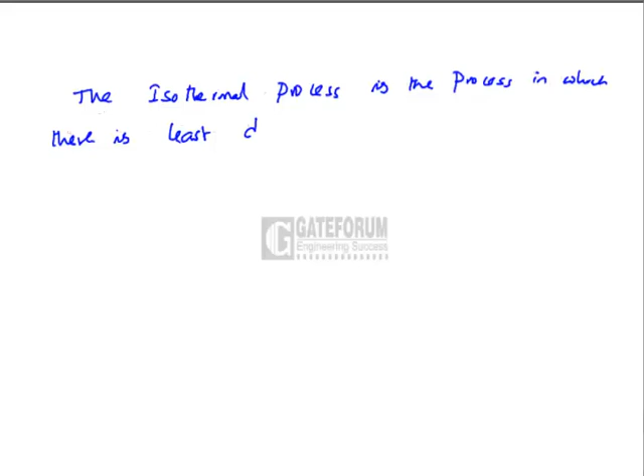This is the process in which there is least degradation of energy, because all the heat supplied to the system is converted into work.

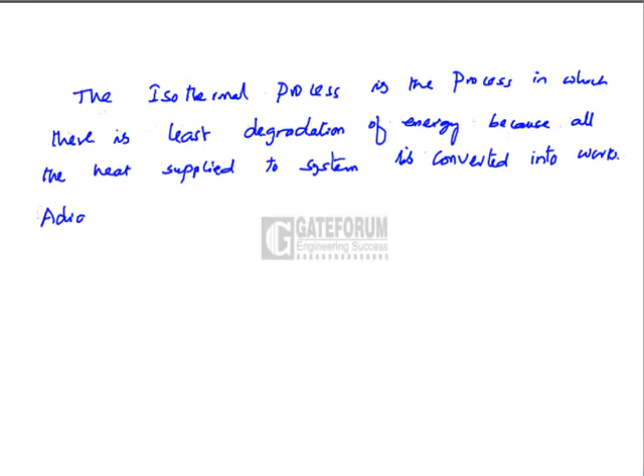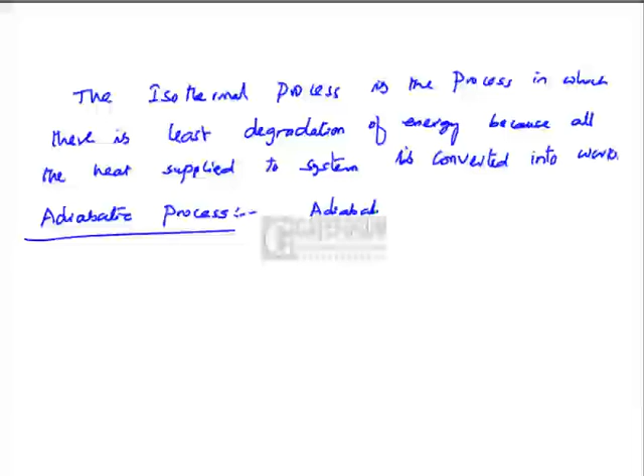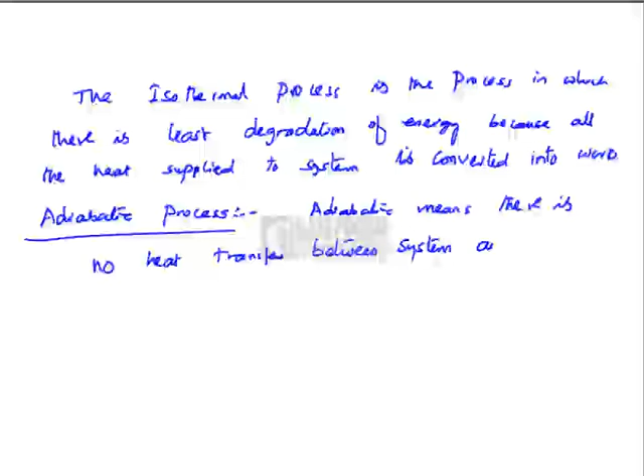Coming to the next process, that is adiabatic process. Adiabatic means there is no heat transfer between system and surroundings, that is Q is equal to 0.

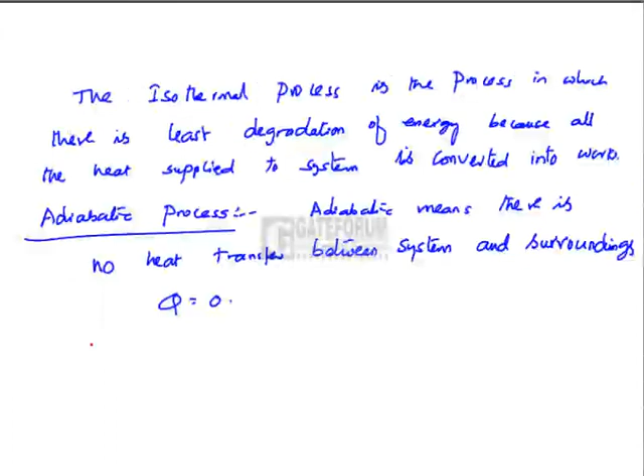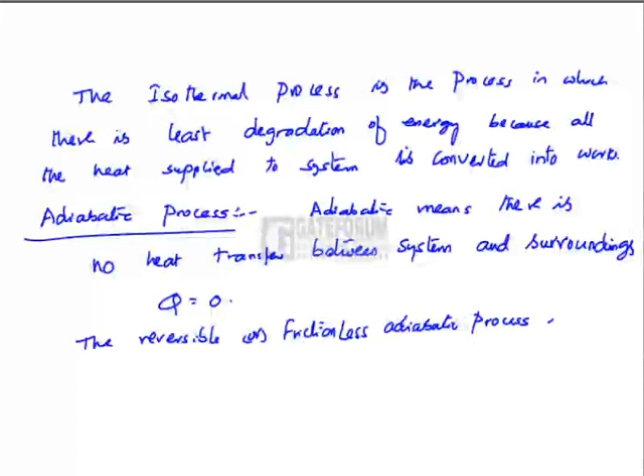The reversible or frictionless adiabatic process is also known as isentropic process, because in this process the entropy of system remains constant.

Iso means same. Isentropic means constant entropy or same entropy. The adiabatic process can be called as isentropic only if it is reversible.

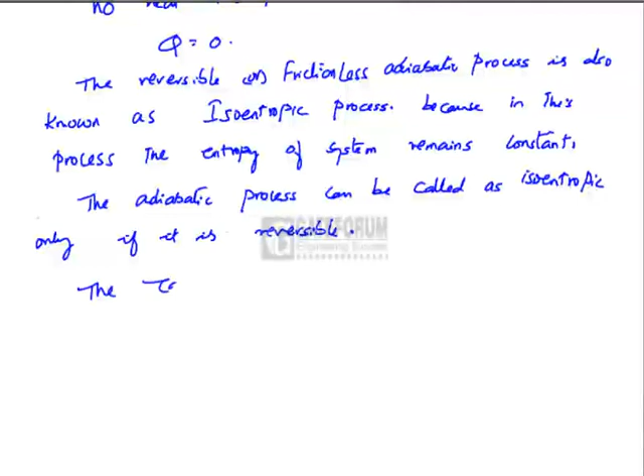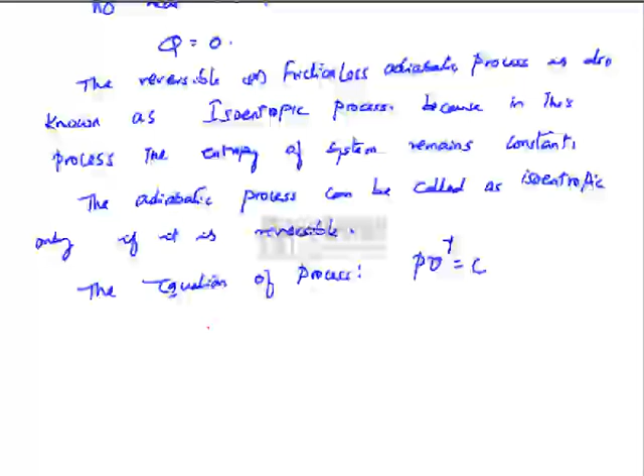The equation of process is PV to the power of gamma is equal to constant, where gamma is the adiabatic index of gas.

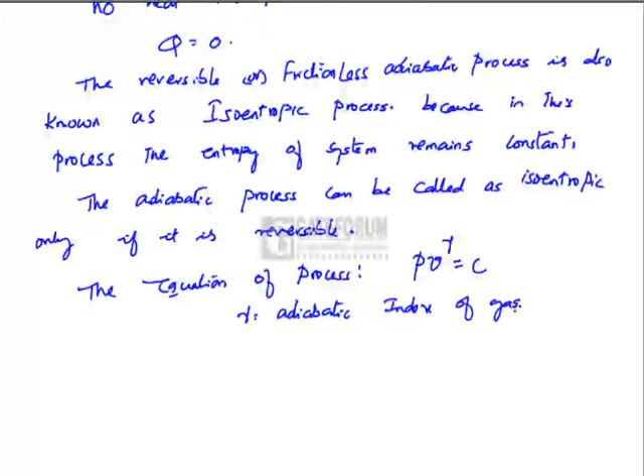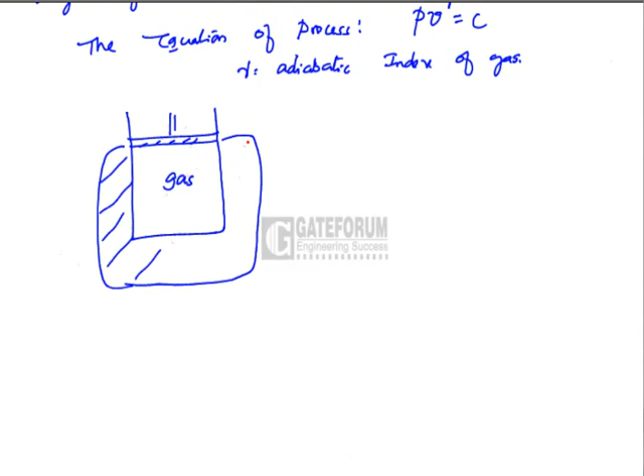Considering a closed system or the gas entrapped in a piston cylinder arrangement, where the system is perfectly insulated from the surroundings. This is insulation, where heat can neither enter the system or be rejected from the system. Heat cannot be rejected, or heat cannot be supplied to the system. Still, the system could do work on the surroundings at the cost of decrease in its internal energy.

The process on PV plane can be represented as a curve, which is a steeper curve than isothermal curve.

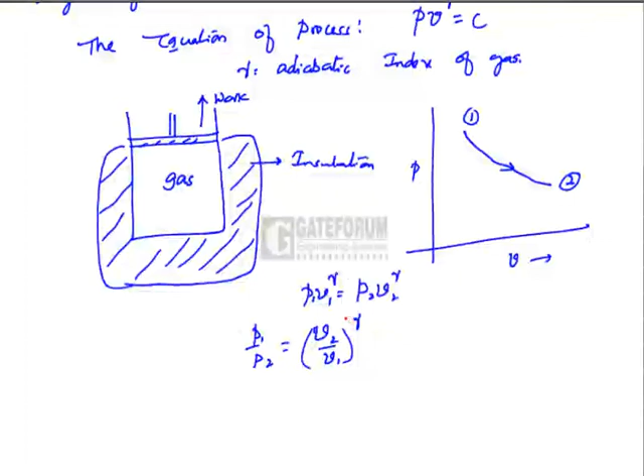The equation is P1 V1 to the power of gamma is equal to P2 V2 to the power of gamma. That can be written as P1 by P2 is equal to V2 by V1 to the power of gamma. Combining this isentropic relation with the ideal gas equation, that is P1 V1 by T1 is equal to P2 V2 by T2. This is ideal gas relation.

Assuming that the working fluid is ideal gas, we get two other important isentropic relations, namely P2 by P1 whole to the power of gamma minus 1 by gamma is equal to T2 by T1, where T2 and T1 in Kelvin only. Also V2 by V1 whole to the power of gamma minus 1 is equal to T1 by T2.

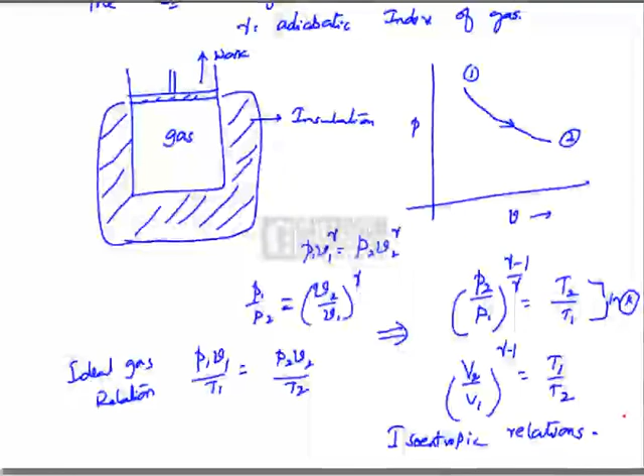These two relations are known as strictly isentropic relations, which cannot be written for irreversible adiabatic process. They should be written only for the reversible adiabatic process, also known as isentropic process.

The work done in an isentropic process undergone by an ideal gas in a reversible adiabatic process undergone by a closed system can be given as integral PDV,

which can be integrated and obtained as P1 V1 minus P2 V2 by gamma minus 1 kilojoules per kg, which can also be written as RT1 minus RT2 by gamma minus 1, that is R by gamma minus 1 into T1 minus T2 kilojoule per kg.

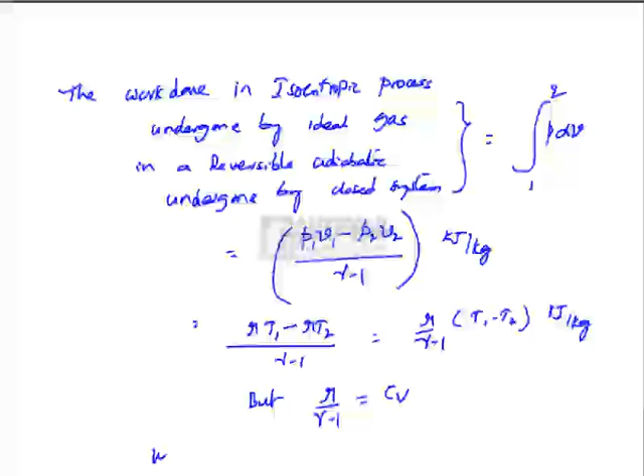But R by gamma minus 1 is termed as CV. Therefore, work done in a reversible adiabatic process can be written as CV into T1 minus T2 kilojoule per kg.

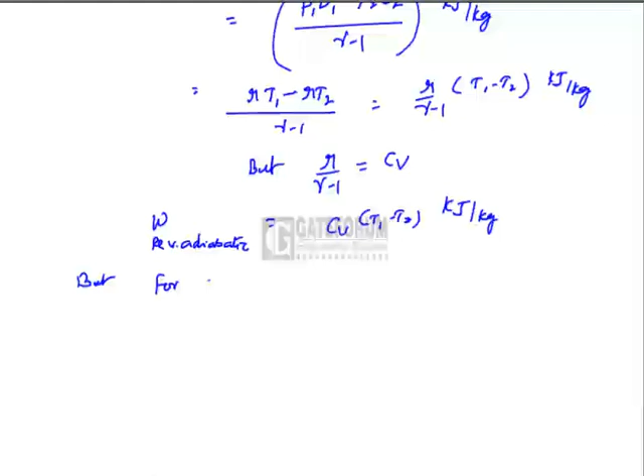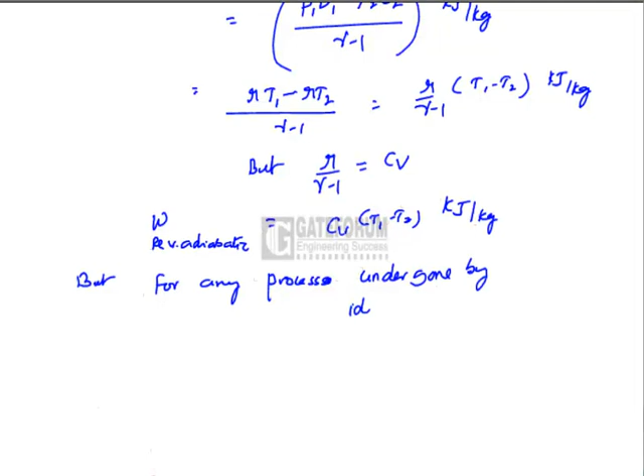But for any process undergone by ideal gas, CV delta T is nothing but delta U. Therefore, work done in reversible adiabatic process is nothing but delta U kilojoule per kg, where U is the internal energy of the gas.

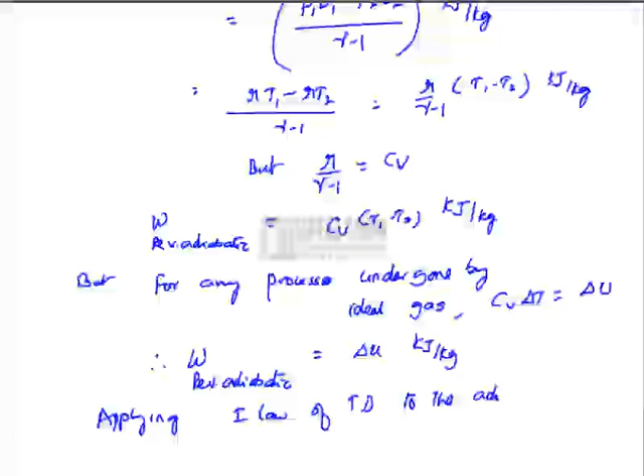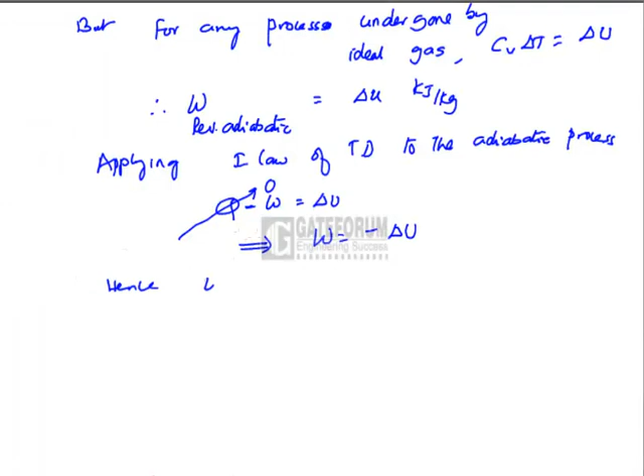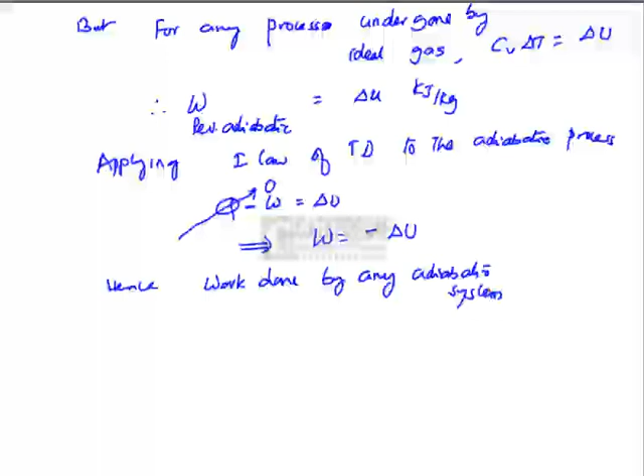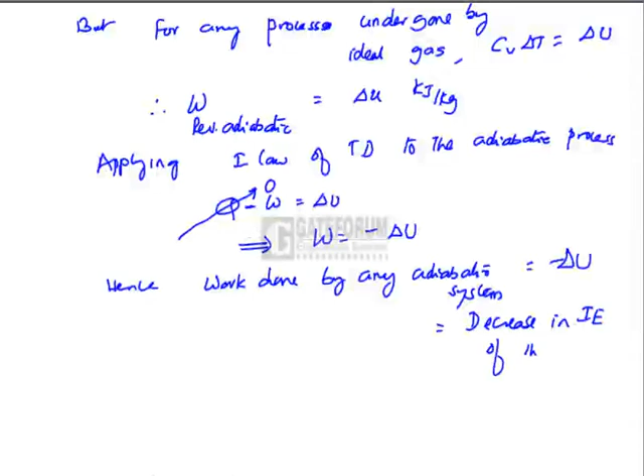Applying first law of thermodynamics to the adiabatic process, Q minus W is equal to delta U, but Q is 0 in the adiabatic process. It means W is equal to minus delta U. Hence, work done by any adiabatic system can be taken as minus delta U, which is equal to decrease in internal energy of the system.

This equation holds whether the adiabatic process is reversible or irreversible.

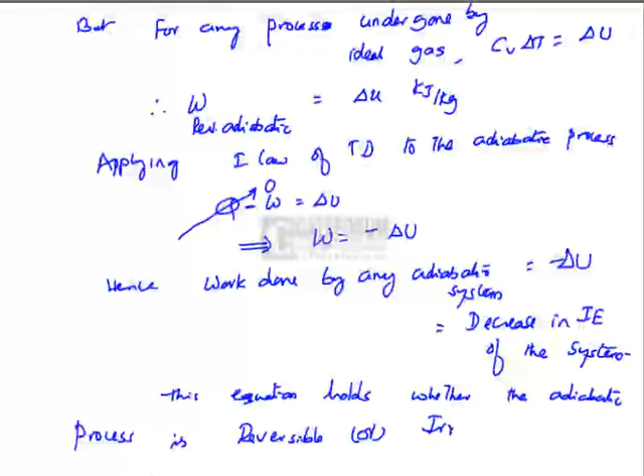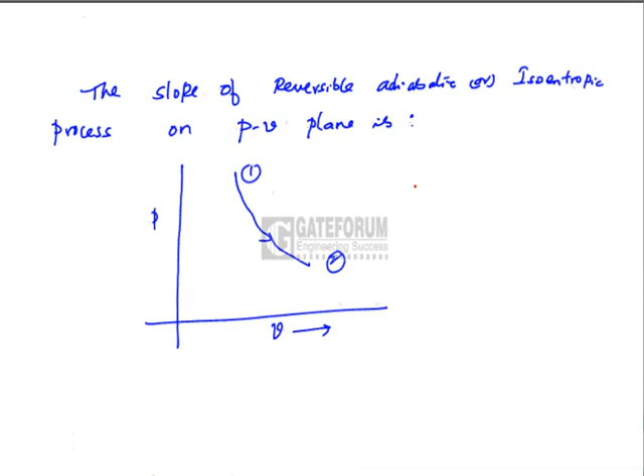The slope of reversible adiabatic or isentropic process on PV plane is dP by dV, the slope of adiabatic process on PV plane, or reversible adiabatic process or isentropic process on PV plane is given by minus gamma P by V.

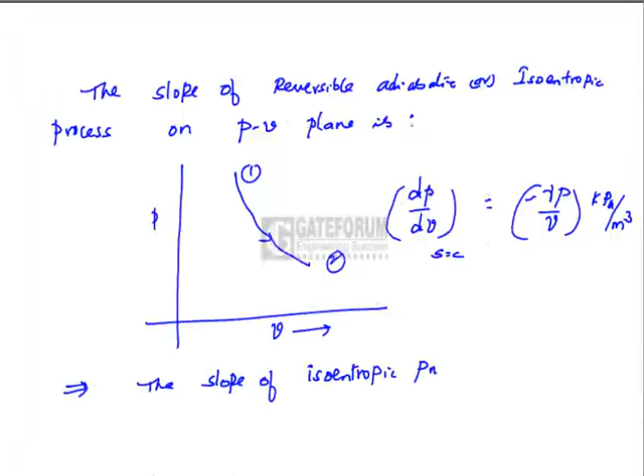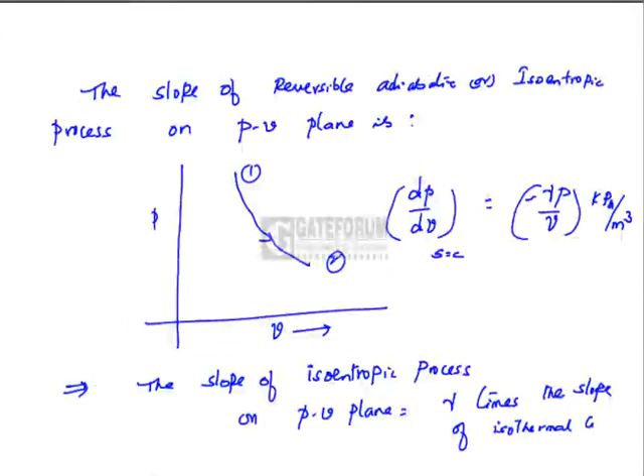That implies the slope of isentropic process on PV plane is equal to gamma times the slope of isothermal curve on PV plane, both intersecting at a point,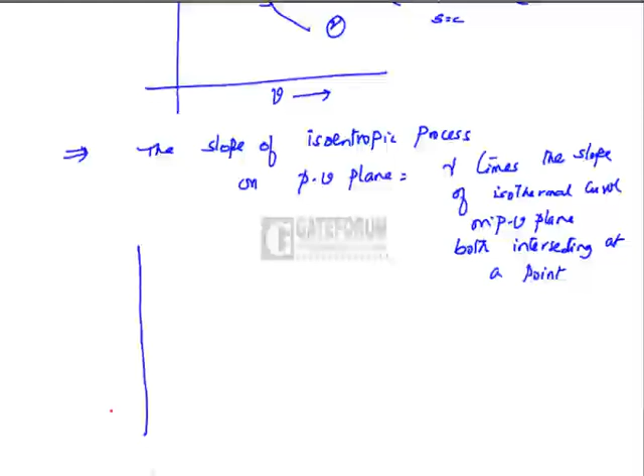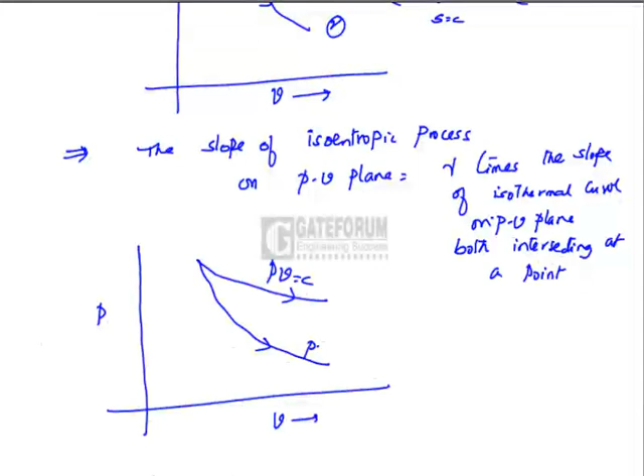which can be shown on PV plane as, if this is isothermal, this is adiabatic. This is PV is equal to constant. This is PV to the power of gamma is equal to constant. 1 to 2 is isothermal. Say 1 to 2 dash is a reversible adiabatic or isentropic. Isentropic curve is steeper than isothermal curve,

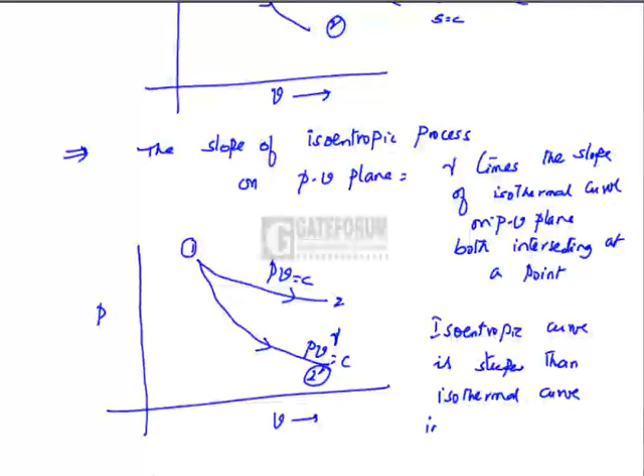intersecting at point 1.

Now let us indicate all the 5 thermodynamic processes on a single tabular form showing the heat interaction and work interaction and PV diagram.

First process is isothermal. Q, W, delta U, PV plane. Q is equal to the work done. Here P1 V1 log V2 by V1, that is the work transfer. Change in internal energy is 0. On PV plane it is shown as a curve having a lesser slope of minus P by V.

Next, coming to the adiabatic process, which is also reversible, Q is 0. Work done is P1 V1 minus P2 V2 by gamma minus 1. Change in internal energy is equal to W. The curve is a steeper curve having much more slope than that of the isothermal curve. Slope is minus gamma P by V for isentropic process.

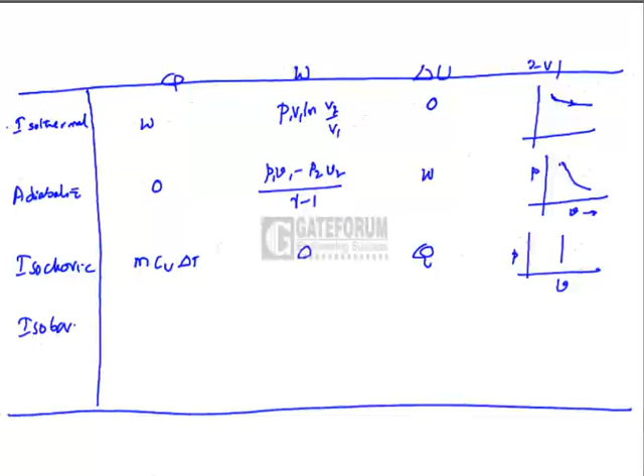Then isobaric process. Q is mCP delta T. Work done is P into delta V, or P is equal to P into V2 minus V1. Delta U is mCV delta T. The process is indicated as a horizontal line on PV plane.

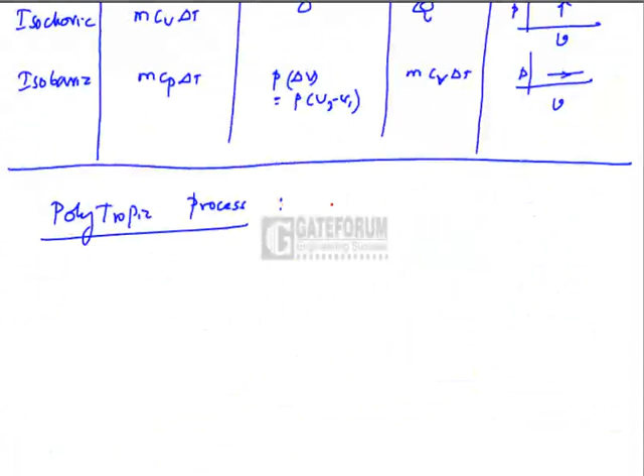Coming to the fifth process, that is polytropic process. The equation of process is given as PV to the power of n is equal to constant, where n is equal to polytropic index.

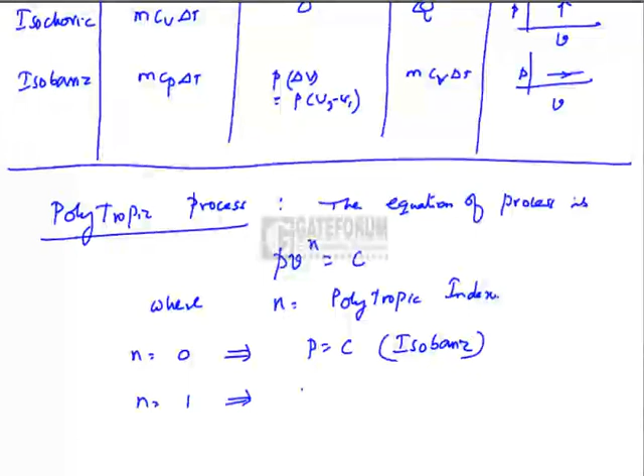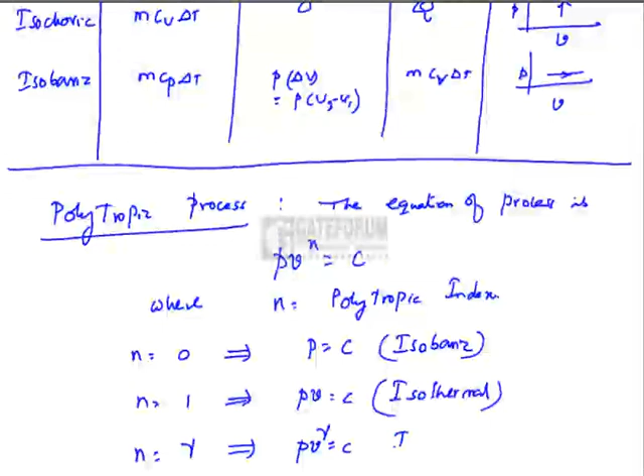If we substitute n is equal to 0, we obtain isobaric process. If n is equal to 1, we get PV is equal to constant, which is the equation for isothermal process. If we substitute n is equal to gamma, we get PV to the power of gamma is equal to constant, which is the equation for isoentropic process.

If we substitute n is equal to infinite, we get volume is equal to constant, which is nothing but isochoric process. If we substitute n greater than 1 but less than gamma, we obtain PV to the power of n is equal to constant. This can be called polytropic.

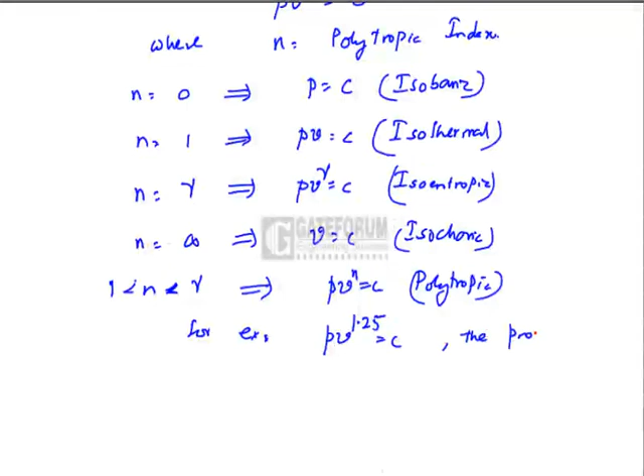For example, PV to the power of 1.25 is equal to constant, where if gamma is equal to 1.4, n is less than gamma, because n value is chosen here as 1.25, which is less than gamma of 1.4, the process is termed as polytropic process. In the polytropic process, n value will be greater than 1 but less than gamma.

The work done in a polytropic process is calculated as P1 V1 minus P2 V2 by n minus 1. The heat transfer in a polytropic process is given as gamma minus n by gamma minus 1 into work done.

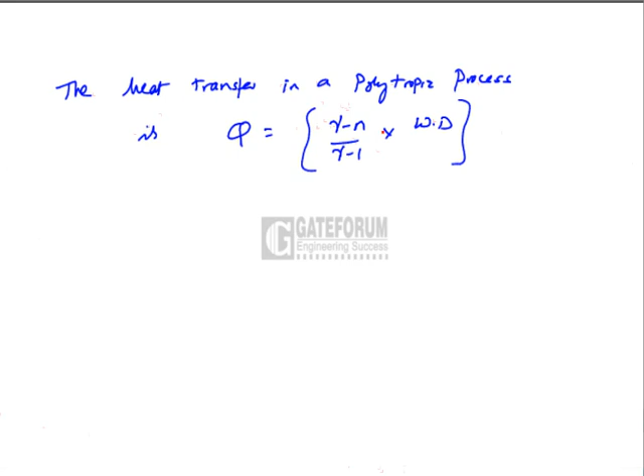If we substitute n is equal to gamma, which is adiabatic process, Q becomes 0.

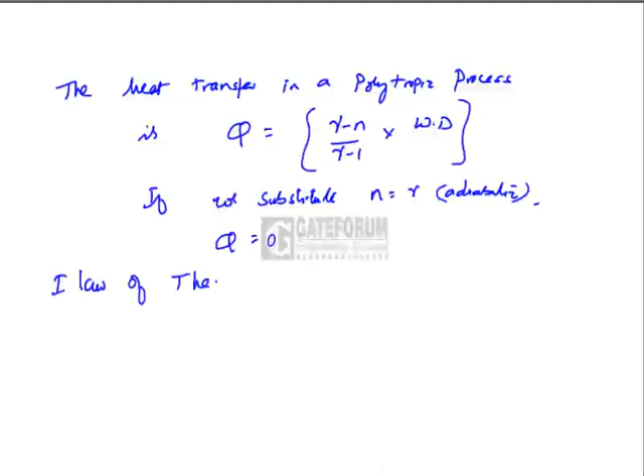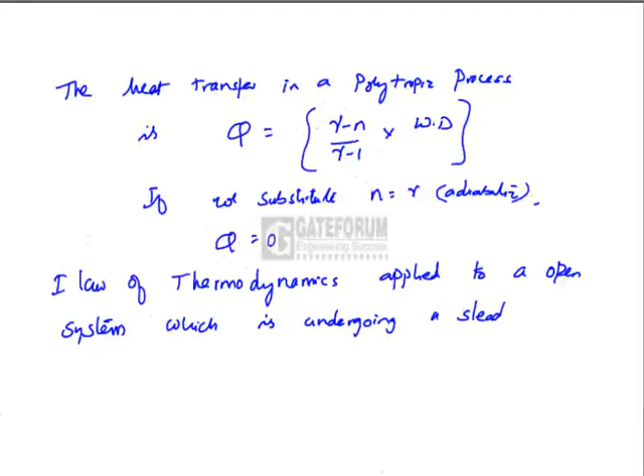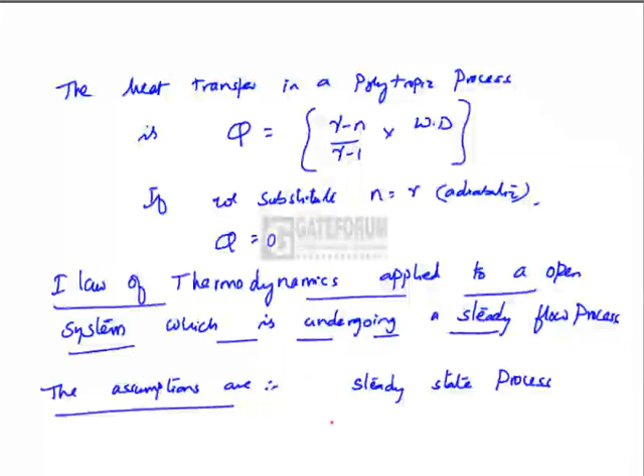Now coming to the first law of thermodynamics, applied to an open system which is undergoing a steady flow process, the assumptions are: steady state process, and the process may be reversible or irreversible.

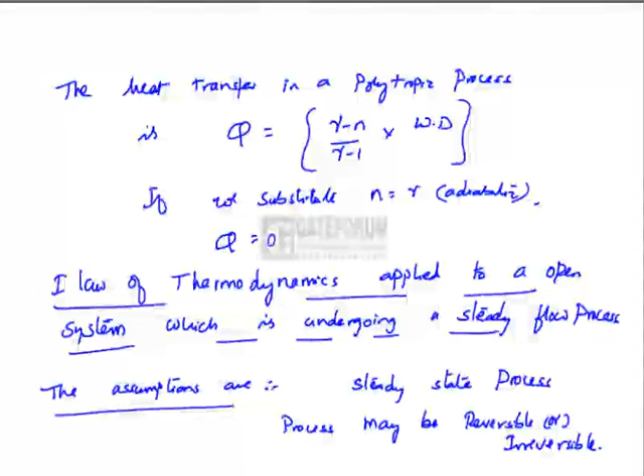Let m dot 1 be equal to mass flow rate of fluid entering control volume in kg per second. M dot 2 is equal to mass flow rate of fluid leaving control volume.

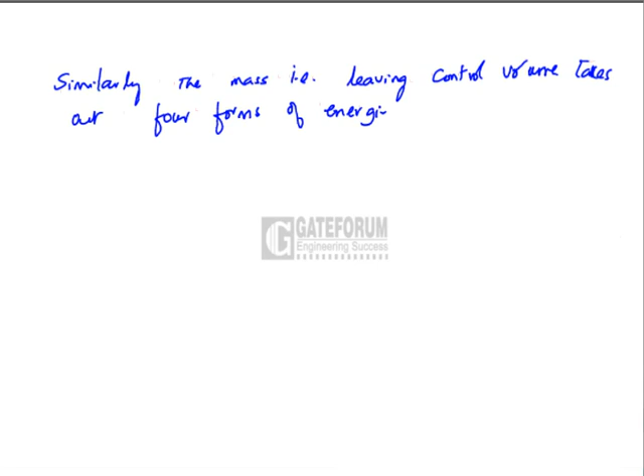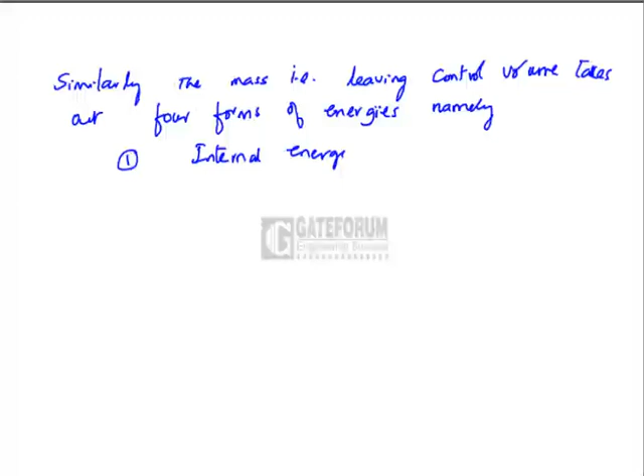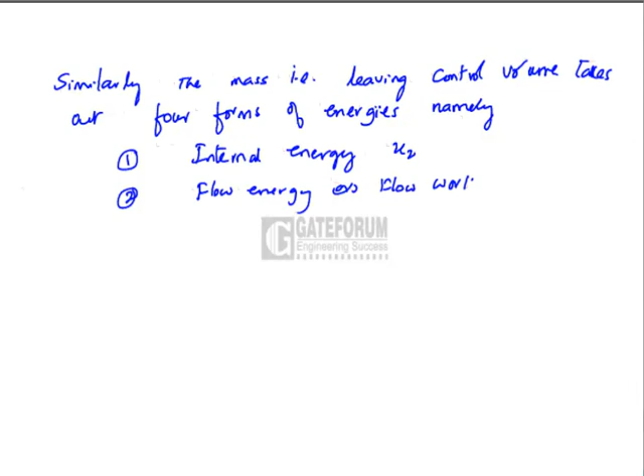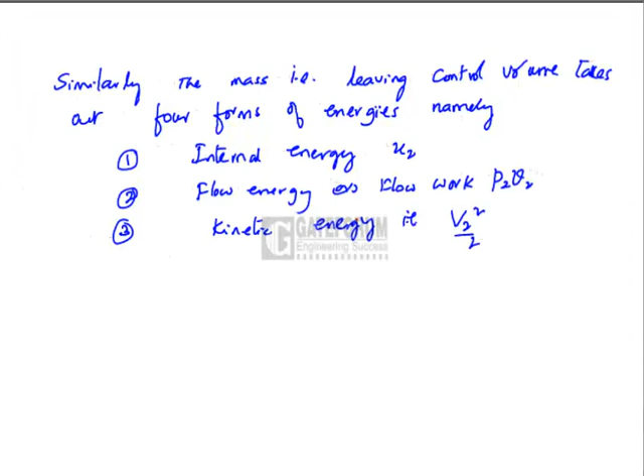Similarly, the mass that is leaving control volume takes out 4 forms of energies, namely internal energy U2; flow energy or flow work P2 V2, where V is the specific volume; kinetic energy, that is V2 square by 2, where capital V is the velocity of the fluid at exit; potential energy G into Z2.

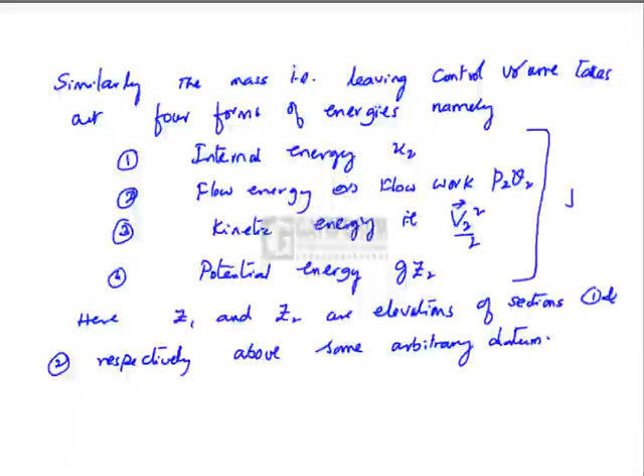Here Z1 and Z2 are elevations of sections 1 and 2 respectively above some arbitrary datum. All the energies are mentioned in joule per kg.

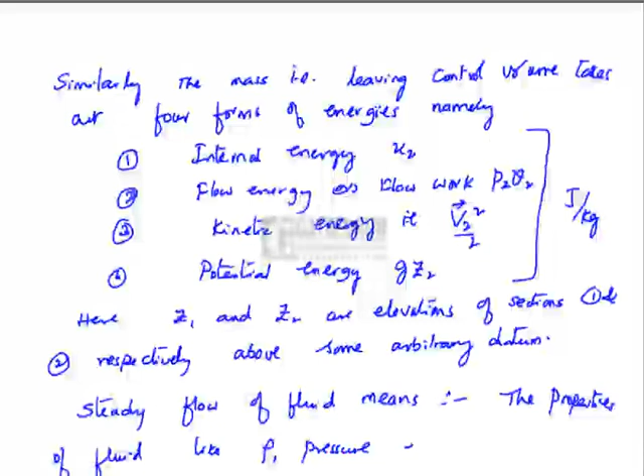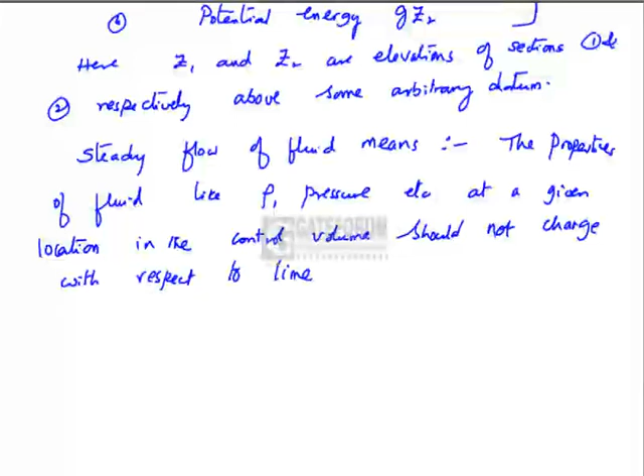Steady flow of fluid means the properties of fluid like density, pressure, etc. at a given location in the control volume should not change with respect to time. This is the meaning of steady flow of the fluid.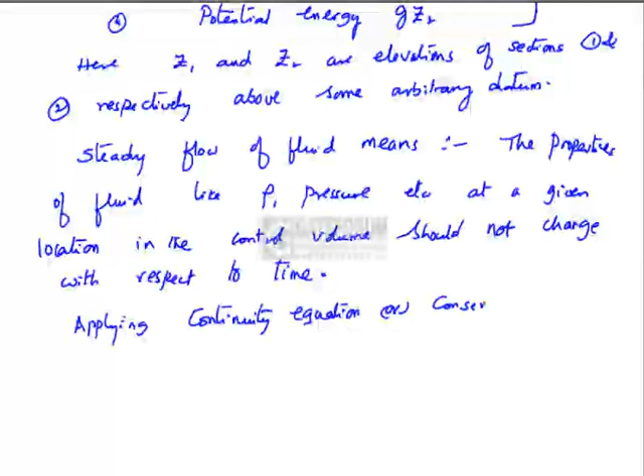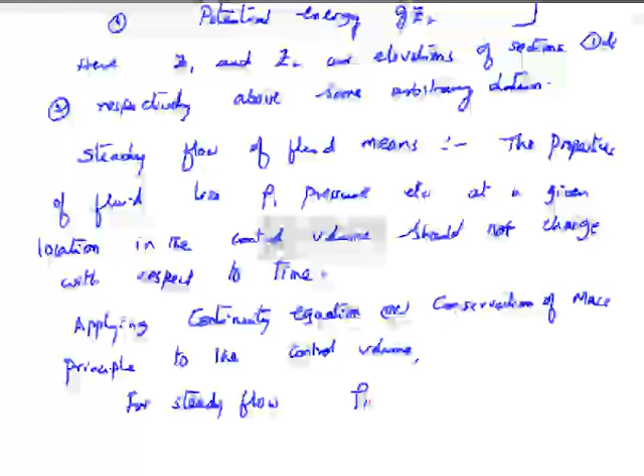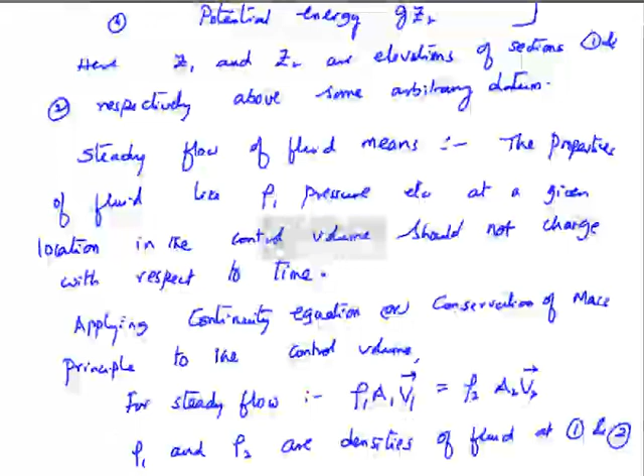Applying continuity equation or conservation of mass principle to the control volume. For steady flow, rho 1 A1 V1 should be equal to rho 2 A2 V2, where rho 1 and rho 2 are densities of fluid at sections 1 and 2, or otherwise the continuity equation can be written as A1 V1 by small v1, where small v1 is the specific volume at section 1, is equal to A2 V2 by v2. V1 and V2 are the velocities of the fluid at sections 1 and 2. Mass flow rate being given in kg per second, that is, m dot 1 should be equal to m dot 2.

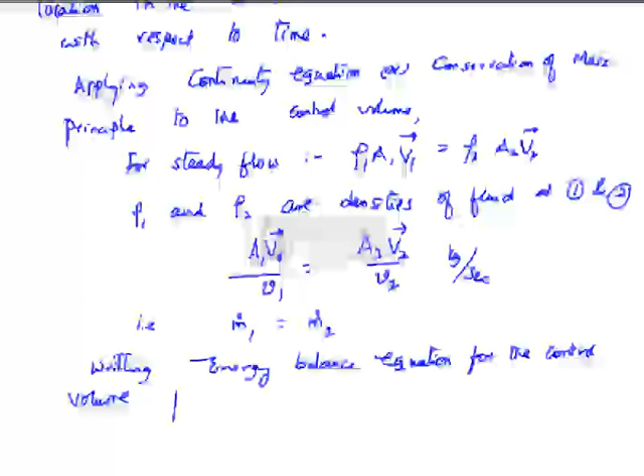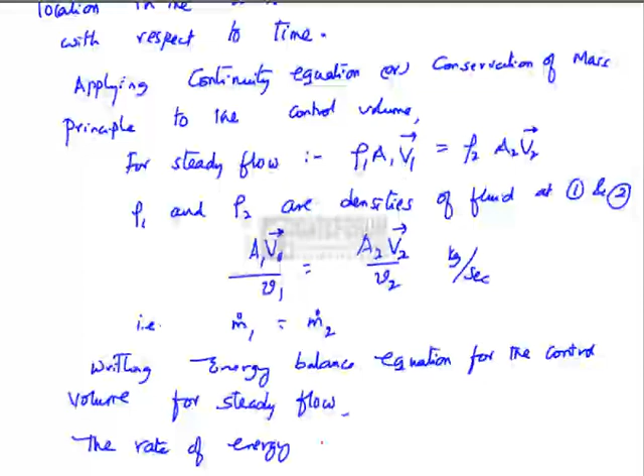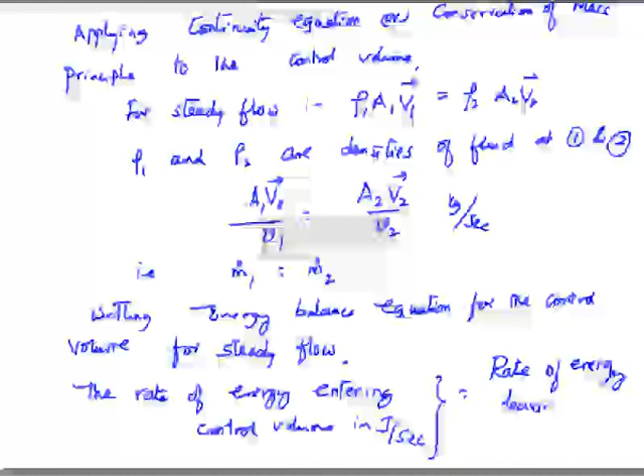Writing energy balance equation for the control volume for steady flow, the rate of energy entering control volume in joules per second should be equal to rate of energy leaving control volume in joules per second.

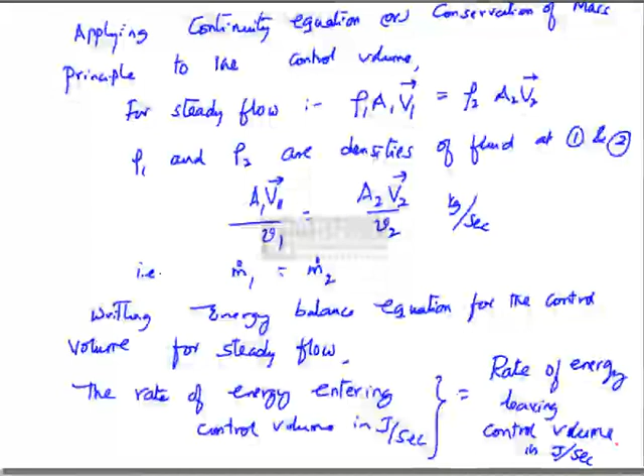The energies entering the control volume: the mass that is going along with the control volume will take in internal energy, flow energy, kinetic energy, and potential energy, plus there is heat supplied into the control volume. That should be equal to m dot 2 into U2, that is internal energy leaving the control volume, plus P2 V2 flow energy leaving, plus kinetic energy leaving, plus potential energy leaving the control volume, plus there is shaft work done by the system. In this equation, Q is positive, W is also positive.

Now let us assume that m dot 1 is equal to m dot 2 is equal to 1 kg per second. Then heat supplied per unit mass is Q divided by m, that is small q, joule per kg. Similarly, work done by unit mass leaving control volume is small w, joule per kg. Small w indicates the shaft work done by the unit mass of the fluid, the work being done by the system, which is positive.